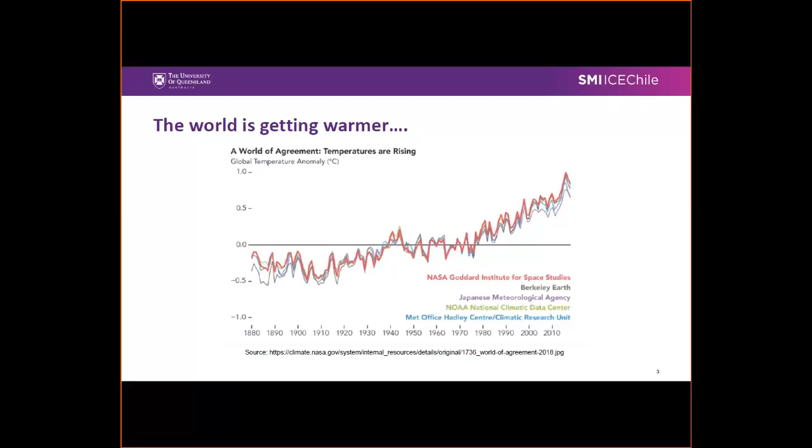Before we start, I want to give you a global vision, a better impression of the global setting relevant for the mining industry. I like this slide very much—it was published by NASA. It's one of the issues everybody in the world agrees on, that the world is getting warmer. As you can see from different institutes all over the world, the specific graph of how planet Earth is literally warming up is pretty much identical. The temperatures are going up, and that is a relevant setting we have to keep in mind when we talk about mining. Next one, please.

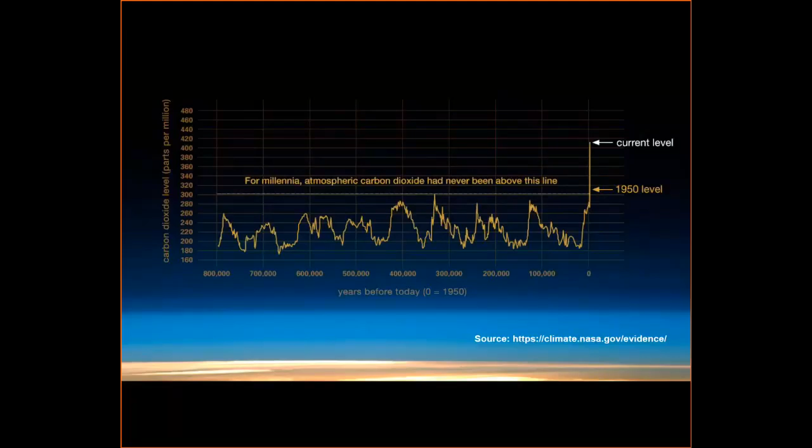What you can see here is related to the previous slide, but now we are looking specifically at carbon dioxide emissions, on geological timescales—not the last 100 or 200 years, but the last 800,000 years. As you can see, there have been ups and downs, consistent with the different geological ages our planet has gone through. However, the amount of carbon dioxide getting into the atmosphere is rapidly increasing, especially in the last 50 years. About 70 years ago it basically reached an all-time maximum, and it keeps on going up. This is what people are talking about—the issue of global warming and carbon dioxide emissions—and these are the facts, this is what we're dealing with. Next one, please.

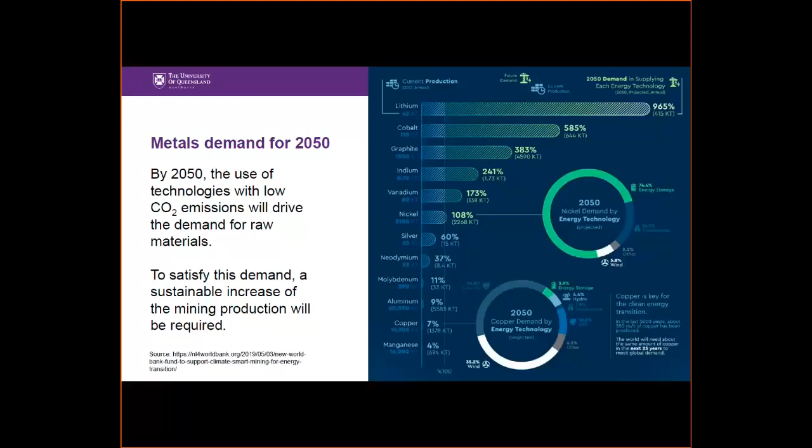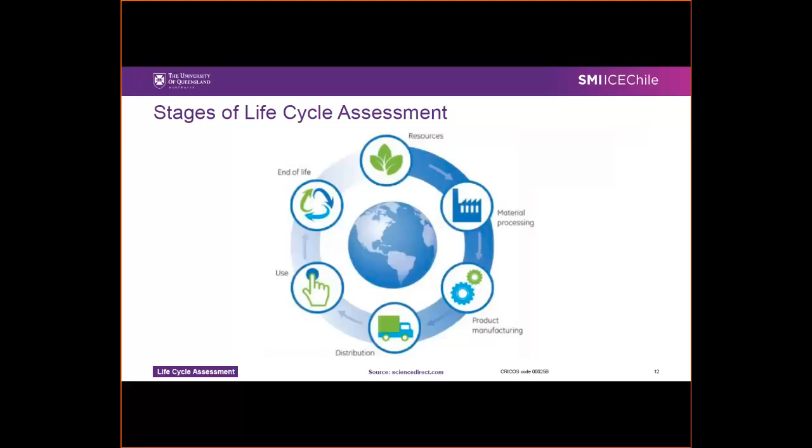It's a highly commented issue, the distribution and supply chain, in these modern pandemic times where we depend a lot on distribution and deliveries. Then there's the utilization itself, and then the end of life, and then back into how we can turn it into a resource for another product.

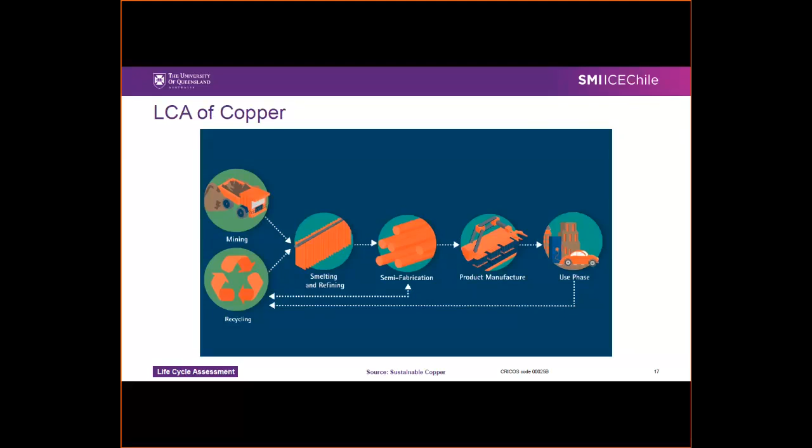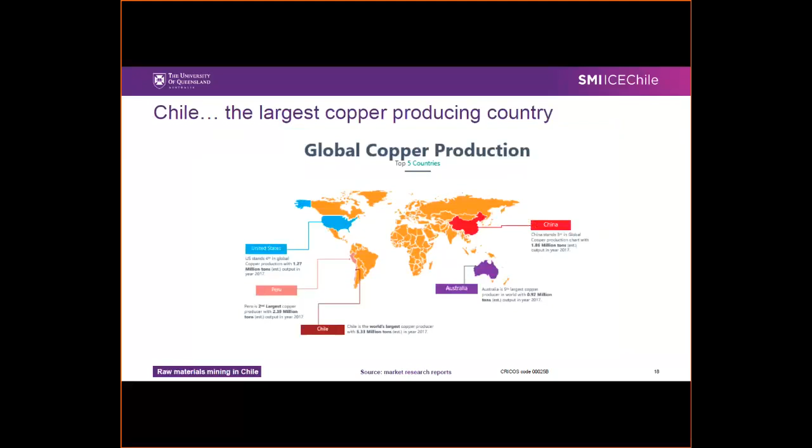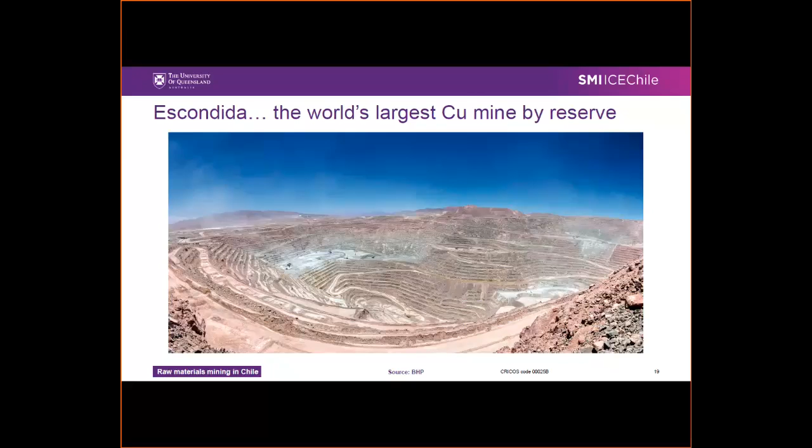When we look at the largest copper mine by reserve, meaning the mine where we know there's still a lot of copper left to be mined and that is economically attractive, that largest copper mine by reserve is Escondida, located in Chile, owned by BHP.

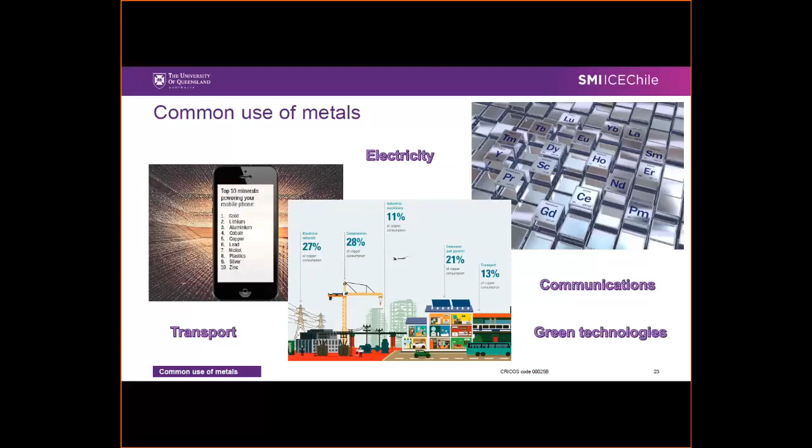On the smartphone, on the left-hand side, you see the most relevant minerals that get into a smartphone - we're talking about gold, lithium, aluminium, cobalt, copper, lead, nickel, plastic, silver, and zinc. So there are quite a lot of metals required to make our normal consumer goods work.

So now we're going to talk a little bit about the economic importance of mining for Chile. And that also explains some of the technological developments that have taken place in the last 10, 20 years in Chile. But first, some economic numbers - what are we talking about?

So what you're looking at here in red is the total copper production of Chile in the world. The yellow is the rest of the world when it comes to copper production - that's all related to the y-axis on the left-hand side of the graph. The copper price, as you can see, is marked in purple on the right-hand side. The reason why I included it here is that, as you can see, the world production of copper and Chile's production of copper is not really related to the copper price. It's driven by demand and that's it - so the copper price doesn't have a major impact on the demand for copper.

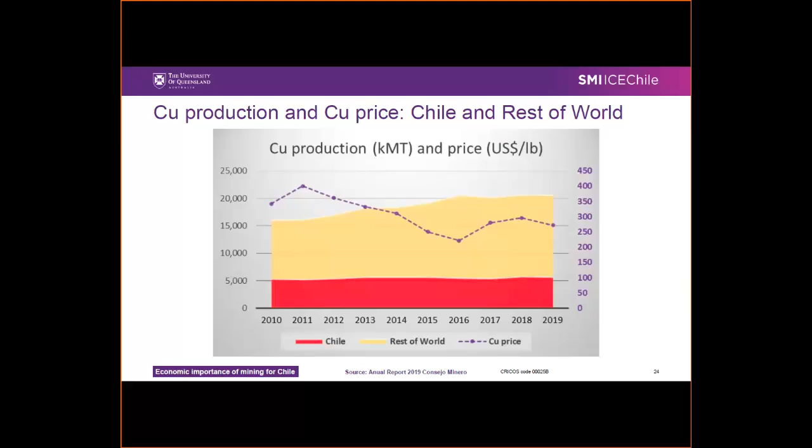Now, when we look at how important the Chilean mining industry is, we can look at the gross domestic product - the contribution of the mining industry to the GDP. And as you can see here, and I was surprised myself when I saw the numbers, though at the same time they make a lot of sense, it is not that significant. Nowadays, we're talking about last year, 2019, the total contribution of the mining industry to Chile's GDP is about 9%, and it came down from maybe 16%.

All the other industries are way more important. Now, that is good news from an economic point of view, because it means Chile is much less sensitive to variations in the copper industry or the mining industry. That makes Chile, because of having a more diversified economy - not as diversified as it could be, but more diversified than it was, say, 50 years ago - less dependent on the mining industry. This also explains why maybe the mining industry is a little bit less important than mining engineers like to think. Mining engineers like to think that Chile would be in big trouble without mining, but maybe that's not really the case anymore. That's what I see from this figure here.

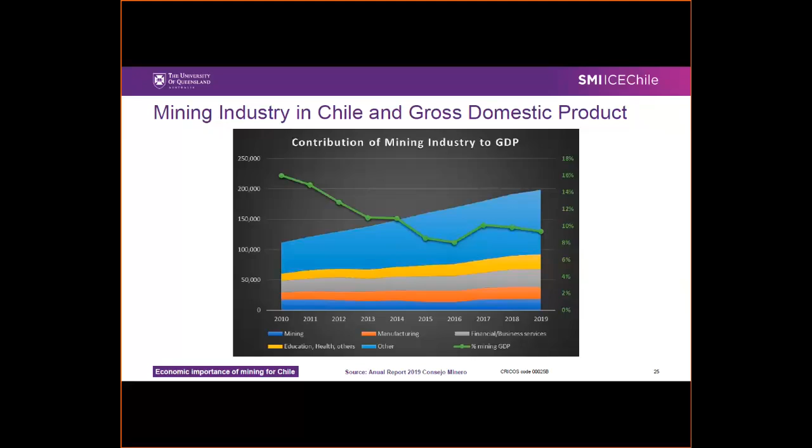Now, when we look at exports, then yes, of course, Chile exports a lot of copper.

It exports a large majority of the copper that is being produced, and that is why, from an export point of view, Chile is important. So from a monetary point of view, if you look at the amount of dollars we get into Chile because of the mining exports, then yes, that is, of course, important.

And if you see how much is exported to the rest of the world, then from the raw material point of view, of course, Chile is very important. Next one, please.

So now we're going to talk about water, and we're going to talk about energy. I'm not going to get into the actual details of what was done in the mining industry to be responsible with water and energy, because I think the mining industry is going the right way. But I want to show you the results, because they are much more interesting than looking at the technical details of what was done. And when we start talking about the future, I will show you some more technical aspects of what might be coming.

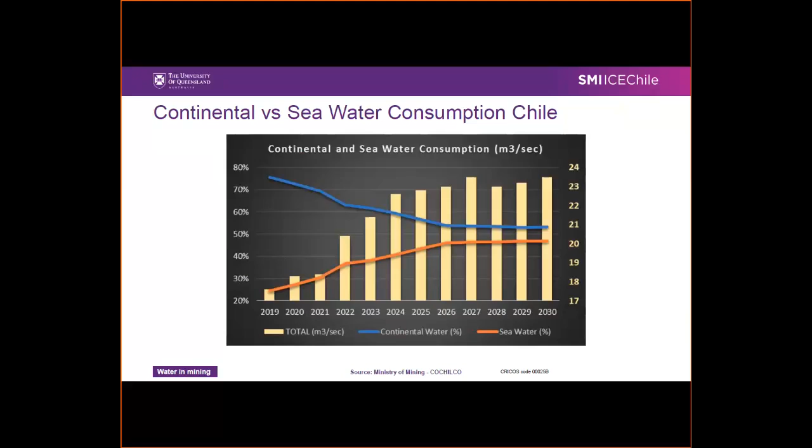However, an ever increasing portion is from seawater, and we're going to use less and less continental water. That has to do with changing technologies; nowadays mining operations are more and more capable of using seawater and making these processes work, and as a result we are using less and less continental water. It also has to do with internal water recycling at the mine sites, of course. Next one, please.

So now we're going to talk about energy. Sometimes I think that in Chile, the whole water issue gets way more attention than the energy subject, and energy actually is, as far as I see, the major issue here on the long term, as you will see later on in some numbers. But energy in Chile—we have a lot of hydroelectric energy, we have snow in the mountains, we have a lot of sun. Yes, there are a lot of renewable energy sources in Chile. Next one, please.

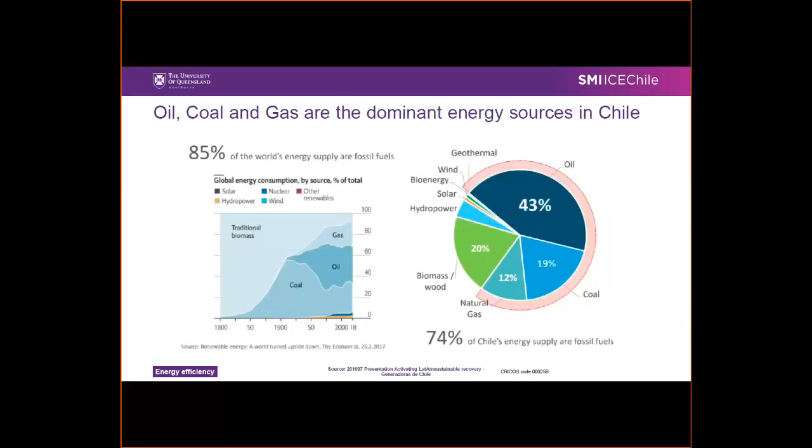We're looking here at general data, not just the mining industry. 85% of the world's energy supply is from fossil fuels. However, in Chile, only 74% of the energy supply comes from fossil fuels. That 11% difference is significant.

95% of the power plants currently being developed in Chile are from renewable sources, and that's without any subsidies, except the endowment of massive sunshine, wind and water.

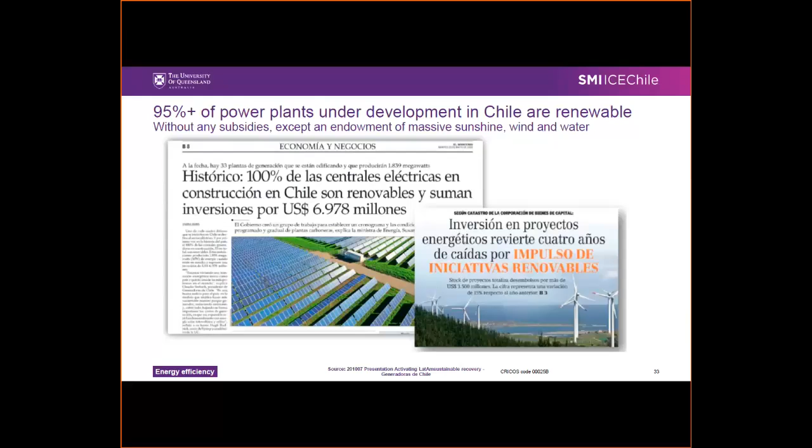Well, I would question the amount of wind in Chile. I'm Dutch myself, and in the Netherlands we know a bit more about wind, because here it typically happens in the afternoon and that's about it. But with the massive sunshine and the amount of water available, a lot of renewable energy sources can be used and are already being used.

Looking ahead to 2023, about 45% of total energy consumption in Chile will be from green sources. So we are going to increase rather rapidly.

As we saw a few seconds ago, Chile has about 74% total from fossil fuels. That is going to go even further down with respect to the total energy consumption, as more comes from greener sources.

That was with respect to mining in general. Looking at specific companies: BHP is switching to green power for their Chilean copper operations in 2021.

Antofagasta Minerals, also a big player in the market, meets almost a quarter of its current power needs with renewable energy, which is again significant.

Enel, a big energy group in Chile, signs with Anglo American's group in Chile the largest renewable energy supply deal. Interesting information about what several companies are doing.

Now we're going to zoom out a little bit and look at some data from the OECD, specifically an interesting document that was published. I recommend you look at it if you have the chance: the Global Material Resources Outlook up to 2060. Let's highlight some of the main conclusions of this report.

The production and consumption of raw materials is shifting towards emerging and developing economies that on average have a higher materials intensity. This explains, in simple terms, that as the world keeps developing, material intensity utilization will go up a little bit.

Technological developments are required and will help, since we're already working on this, to decouple the growth in production from material input for production. Basically, there will be more demand, but we want the technology to be smarter, to reach a point where we can produce more with less.

Recycling in that context is becoming more competitive, meaning we are going to supply more and more raw materials from recycling. However, primary mining resources will still be necessary.

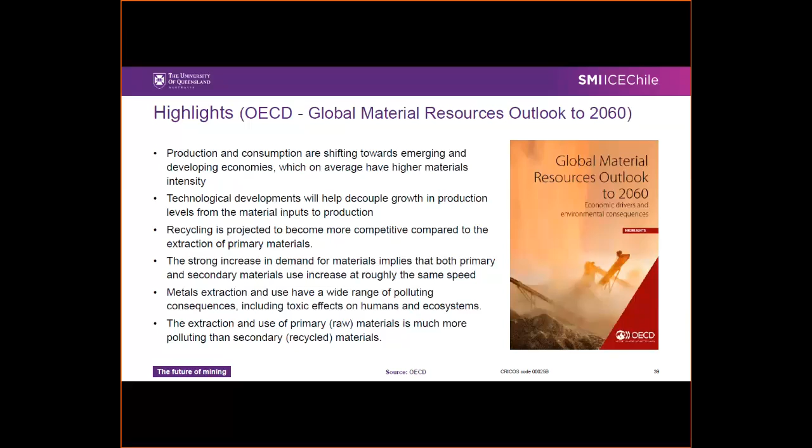So here's some developments that are coming, and now we're going to look at some images so you get a feeling of what it's looking like. One of the big developments in mining, a topic many mining companies are talking about, is progressing, it's moving forward, though not that fast.

We're talking about in situ leaching. I won't bother you with all the technicalities, but basically in situ leaching means you don't take the ore out of the ground, so there's no open pit mine, there's no underground mine. You dissolve the elements you're interested in, the metals you're interested in, at the place where they are, and then you pump it up.

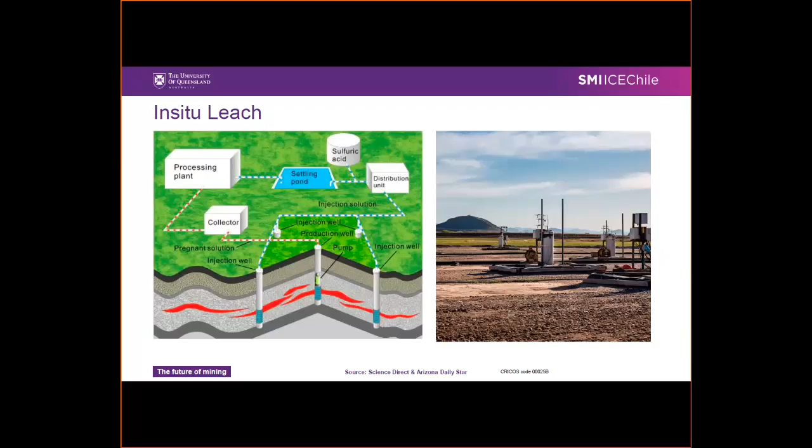Instead of the typical mine site landscape with literally a hole in the ground, you would see something like what's on the right-hand side - this is a uranium production site, where uranium is dissolved underground and brought up by pumps. It's put into solution and brought up. That is everything you see. This is an industrial uranium production site used for, in this case, nuclear energy. Next one, please.

This is something that will be developing. It's not at production scale yet, but it will keep moving forward, and it will be a major challenge. There's a recognized responsibility to do this in the most sustainable or environmental way, as an alternative to continental mining. Next one, please.

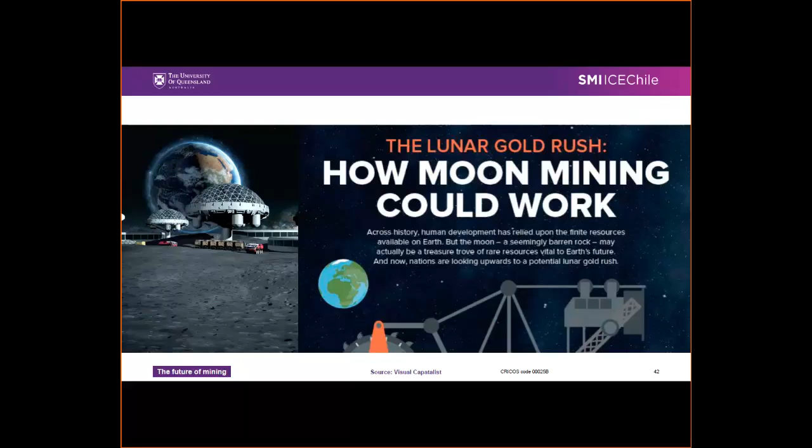There are many opinions on this. Sustainability in the universe is also an issue. I just wanted to mention it because it exists and there is a lot of research going on in this area. Next one, please.

So now we're going back to Earth and looking at the digital transformation of mining. This is very relevant and has gone through tremendous recent development because of the pandemic. Basically, this means you can control any mine site, any industrial operation, from anywhere as long as you have good communication technology. That means you could have centralized control centers.

I'm not sure if any of you has ever been in Perth, Australia. If you come from the airport and go to the city, you literally pass by the Rio Tinto centralized control operation located in Perth, which controls all the mining activities of Rio Tinto in Australia. So this is something that exists.

It's used at some Chilean sites too, implemented at a slightly less ambitious level, I'd say. You'd find the control room right next to the entrance gate, with the mine 20, 30, or 50 kilometers away from that entrance gate. But this is ongoing, it's a stayer, and it works - there's no question about this one. Next one, please.

Something more specific, just to mention it, as some of you might have heard: in some cases copper minerals are associated with arsenic, and then there's the actual pollution or contamination aspect. This is especially the case in the second region, close to Calama, where there are a lot of high-arsenic copper ore bodies. The pollution is related to the arsenic and not so much to the copper itself.

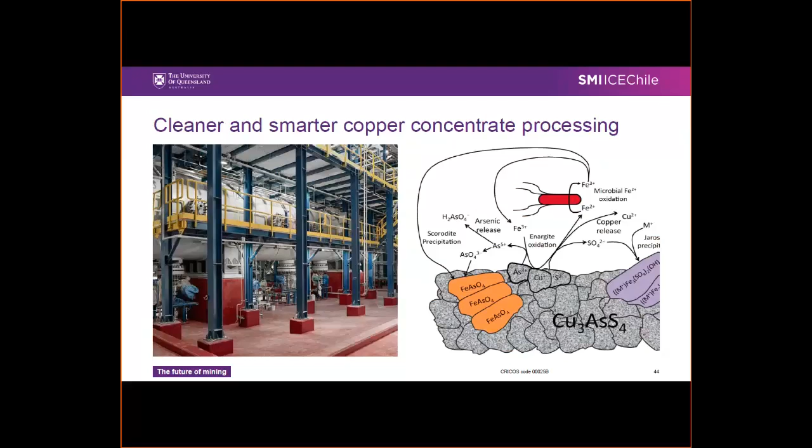One of the options is to process these types of ores at high temperature and high pressure in these vessels that you see on the left-hand side. They are capital intensive and they are environmentally extremely friendly. And technically they work very well, but they're expensive.

Now, about the tailings—of course you can't talk about mining, you can't talk about sustainability without talking about tailings. And I'm pretty sure all of you will have heard about this major disaster last year in Brazil, at Brumadinho, where the tailings dam collapsed. It was a terrible accident. It literally put the mining industry upside down.

There are some developments, and I want to mention just two here, that recognize that having a tailings dam is a liability, it is a risk, it is something that should be avoided, but it's not that easy.

You could also turn it into bricks. There are initiatives that point in that direction. However, the amount of tailings that come out of the mining industry is so significant that if you turned it all into bricks, you wouldn't have enough space in Chile—a country that is 4,000 kilometers long—to use all those bricks to build houses, because there is so much tailings.

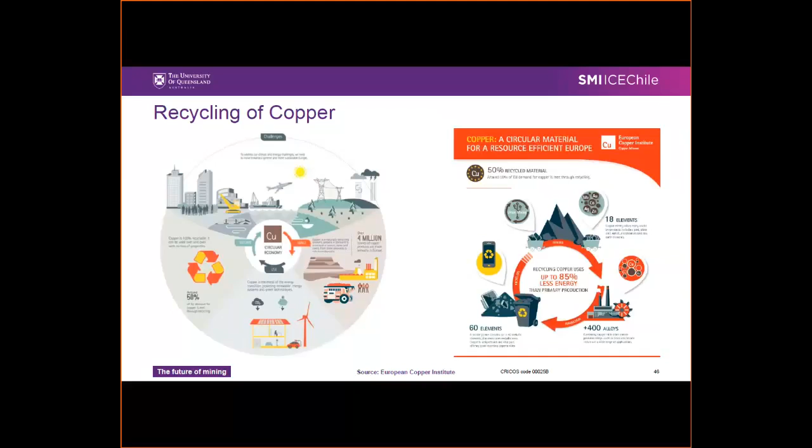And the energy efficiency when it comes to recycling is 85% better—it uses 85% less energy than it would use if you took it from raw material. So that is very positive and very significant.

So we know how to do it. The technology is there. What doesn't work that easily is the economy behind it. And the economy behind it has different aspects. One of them is that energy is required. Energy nowadays is expensive in Chile, but energy is also expensive in the rest of the world. And I give as an example that we also have water scarcity—it's not only in Chile.

It happens in Australia, in Europe, in Spain, in Italy, in Greece. There are different parts of the world significantly suffering water scarcity and global heating. There's a reason why the planet Earth is called the blue planet, because there is a lot of water, a lot of seawater.

If energy would be cheap, we could treat a lot of that seawater with an insignificant impact on sea levels, and we could produce all the water we need for every possible use we want to give it. However, that's not possible because the energy is still very expensive.

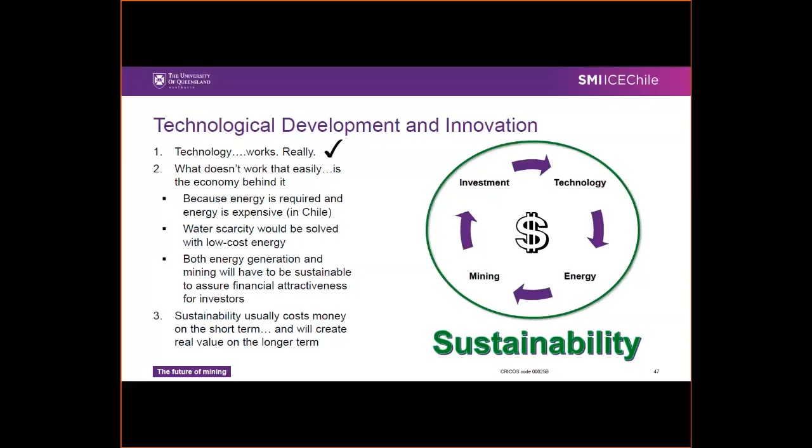To finalize, I think that the future is already there. It's a quote that comes from the year 2003 - not my words - but the future is unevenly distributed as we are speaking now.